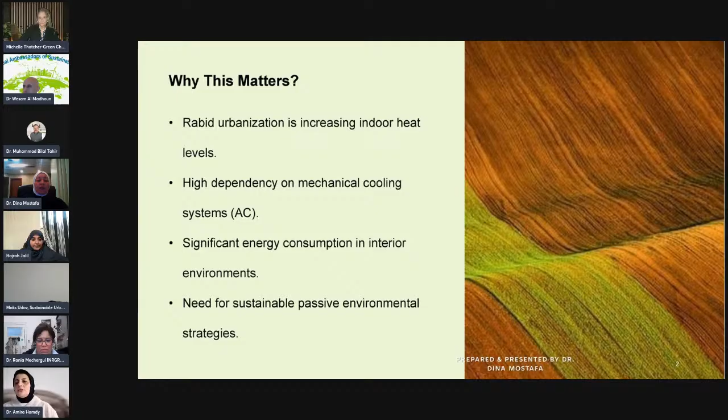My presentation today is about nature-based solutions, the NBS, and biomimicry: how plants and soil play functional components of modern interior environments. First of all, why this matters, why it's very important. Firstly, rapid urbanization is increasing indoor heat levels, as well as the high dependency on mechanical cooling systems, the AC, significant energy consumption in interior environments, and the need for sustainable passive environmental strategies.

What are nature-based solutions? Maybe for the first time you are hearing what NBS is. NBS are strategies that use natural systems to solve environmental challenges. Why do we need natural systems in our life? Firstly, because they enhance thermal comfort, air quality, and human well-being.

And what is also biomimicry? Biomimicry might be a weird terminology that nobody's using except maybe for architects and interior designers. Biomimicry is learning from nature's strategies and systems, and it consists of three levels: form, process, and system.

Form is the shape and structure of plants and trees. Process is how it works, for example how the plant absorbs water from the soil and releases carbon dioxide. And systems, for example the ecosystem relationship, and how we can apply all these into our interior spaces.

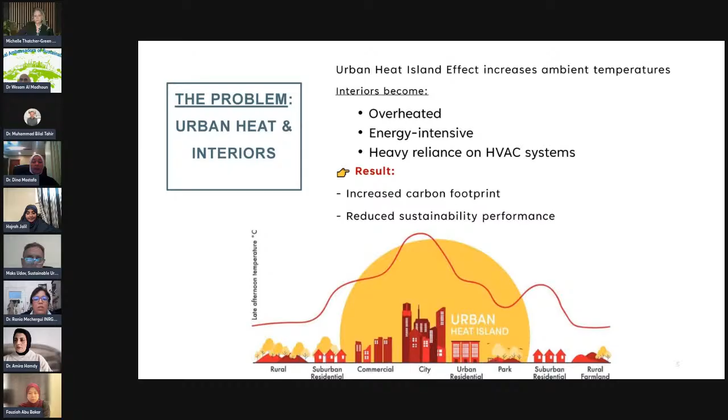Our main problem is urban heat and interiors. Urban heat islands affect the increase of ambient temperatures into our interior spaces, leading to overheated spaces, energy-intensive design, and heavy reliance on HVAC systems. This leads to increasing carbon footprint as well as reducing the sustainability performance in our interior spaces.

So if we adapt a cooling cycle similar to what plants do inside their system - first, the natural cooling mechanisms happening in the plant. Plants absorb water through roots and release moisture through leaves, which is called evapotranspiration, and this process cools the surrounding air.

It has a very good impact on interior spaces, as it leads to temperature reduction from 2 to 5 degrees centigrade indoors, as well as improved humidity balance, which we can apply in interior spaces through vertical green walls, biophilic partitions, and indoor gardens.

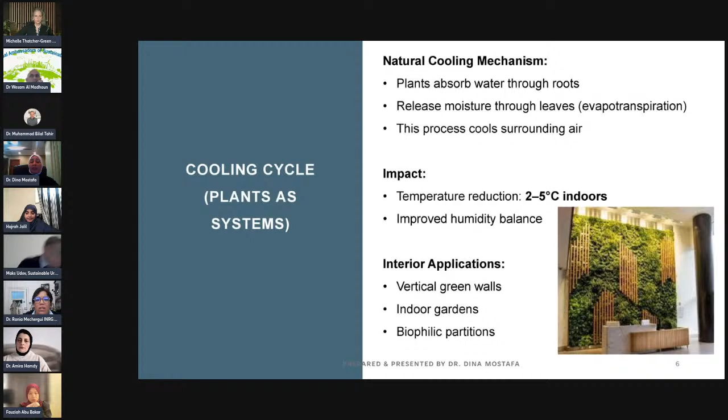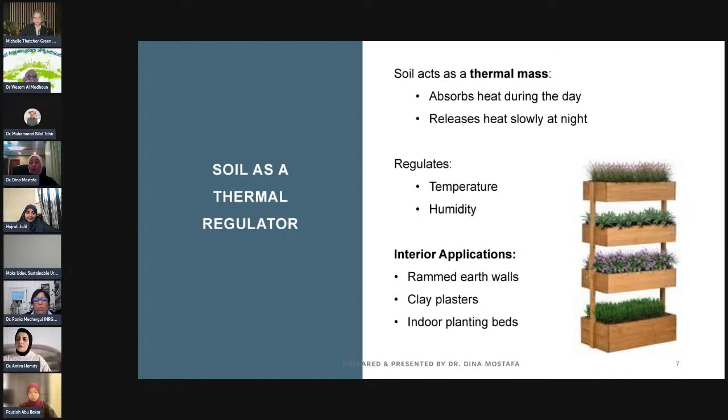In addition, another example: if we take soil as a thermal regulator, soil acts as a thermal mass - it absorbs heat during the day and releases it slowly at night. So it can regulate the temperature as well as the humidity, and we can apply it in interior applications through rammed earth walls, clay plasters, or indoor planting beds.

As we can see here, besides the plants and the soil, this biomimicry translation diagram shows things from nature and the strategy we follow, and how we can apply it into our interior applications.

First example: termite mounds, which have very passive ventilation because they take in the hot air and send it up, creating good airflow inside as a system. Then we have the cactus, which is good for water retention and shading, and can be used as an adaptive shading element in interior spaces.

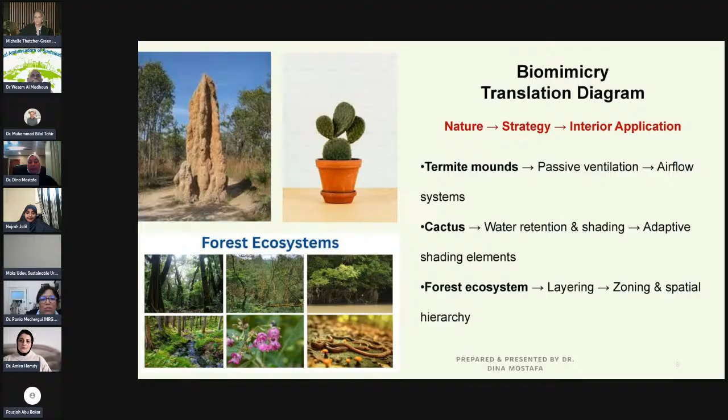Third, we have forest ecosystems, taking into consideration good opportunities you can follow from layering, which gives zoning and spatial hierarchy. Plants also play a functional role in interior systems - they improve indoor air quality, reduce heat gain, and create microclimates.

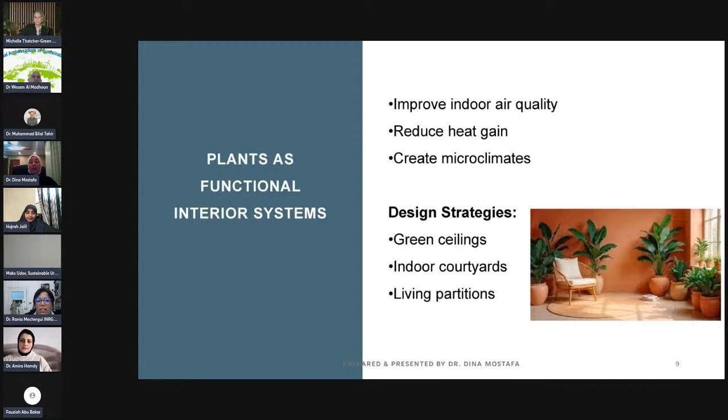So the design strategies we can follow to present any of these examples include applying the green ceiling, indoor courtyards, and living partitions.

Soil and natural materials can also be applied into interiors, as they have high thermal inertia as well as breathable surfaces. This can benefit interior spaces as it stabilizes interior temperature, enhances acoustic comfort, and improves indoor air quality.

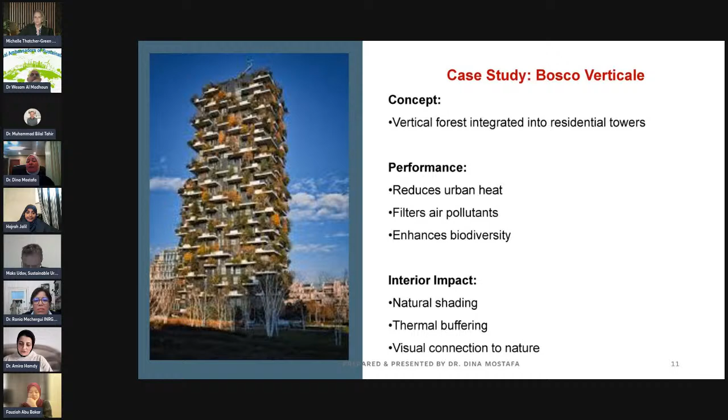One of our examples here is the case study of Bosco Verticale. Its design depends on a vertical forest integrated into residential towers. It has very high performance in reducing urban heat, filters air pollutants, and enhances biodiversity. It had an excellent impact on interior spaces as it allowed natural shading, thermal buffering, as well as visual connection to nature.

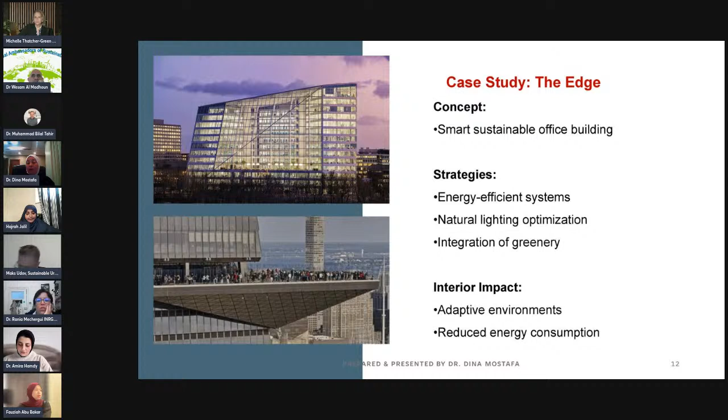Our second example is the Edge building in Amsterdam, considered one of the smartest sustainable office buildings in the world. It provided three important strategies: energy efficient systems, natural lighting optimization, and integration of greenery. It had an excellent impact on interior spaces through adaptive environments and reducing energy consumption.

One very good example currently is where I'm residing, in Saudi Arabia in Jeddah. The Saudi context is designed with the character of extreme hot climate, high cooling demands, and increasing focus on sustainability. So we have a very good opportunity to integrate NBS into our interiors, which can reduce energy use, improve thermal comfort, and support sustainable development.

All of what we have mentioned is being applied as an example in the future model, Neom City. Neom City is a futuristic city focused on sustainability, innovation, and environmental integration. Accordingly, Neom City is also aligned with the Vision 2030, which promotes sustainable cities, energy efficiency, and environmental responsibility, playing a very good role in interior design spaces as it reduces energy consumption and enhances quality of life.

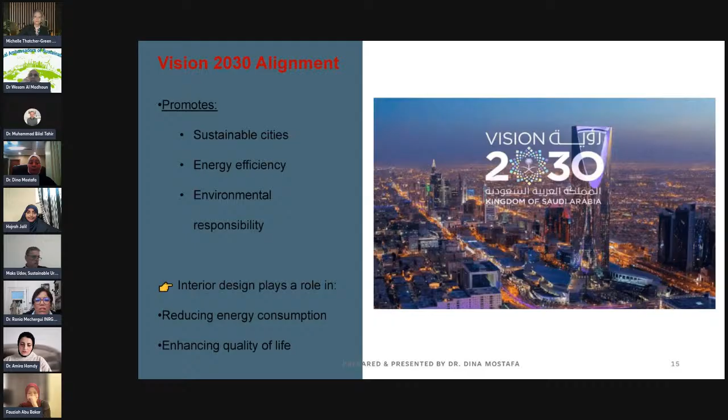According to what we have mentioned previously about interior design application, we have too many solutions for that, using biophilic zoning instead of rigid partitions, indoor microclimate creation, integration of natural materials, and responsive adaptive spaces. It's very challenging as it needs maintenance requirements, water management systems, initial cost perception, and one of the huge things is the lack of awareness.

So our vision is for interiors to be presented as living ecosystems, integrating nature, technology, and AI systems as well. The conclusion is nature is not an inspiration only, but it plays a very functional design partner as well. So the future of interior design lies in integrating natural intelligence into the built environment. Thank you for listening.

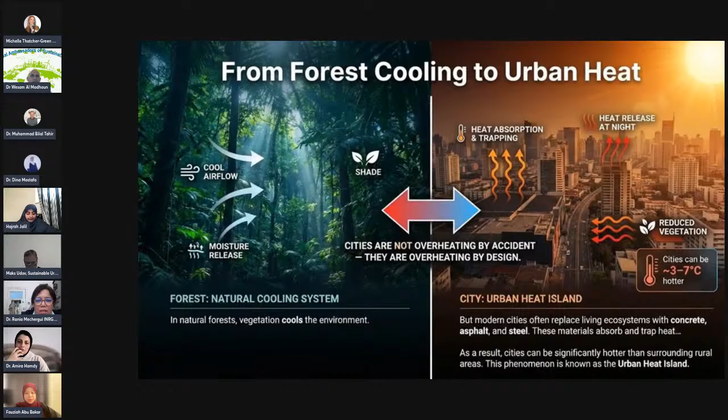This phenomenon is known as the urban heat island effect, where the temperature in cities can be 3 to 7 degrees Celsius higher than nearby rural or forested landscapes. This is not just a temperature issue. Urban heat increases energy demand for cooling, for aircon, causes stress for people, and can worsen the impacts of climate change. So the question we must ask is: if forests can naturally regulate temperature and maintain stable microclimates, why don't our cities do the same? This is exactly where we use nature-based solutions and biomimicry, and this is how we design the cities of the future.

We saw that cities now often get overheated because we remove the very systems that naturally regulate the temperature. So the next step is not complicated in theory, although it can be challenging in practice. We need to bring those functions back. This is where we apply nature-based solutions.

It is a natural system to address urban challenges, not only environmental but also social and economic issues. For example, when we plant more urban trees, we are not simply making a city look beautiful or greener. We are creating shade, lowering the surface temperature, improving air quality, and supporting biodiversity. And when we introduce green roofs, gardens, landscapes, we are not adding decoration. We are rebuilding the city's capacity to absorb more water, reduce runoff, and control the temperature. So we use nature itself as part of the solution.

So how? There are various possible ways. For example, we can plant trees and green roofs that help to cool cities. It can also help nature manage water. When rainfall hits a city, water flows quickly over concrete and causes flooding. But when we have green spaces, wetlands, bioswales, the soil and plants themselves can absorb water like a sponge.

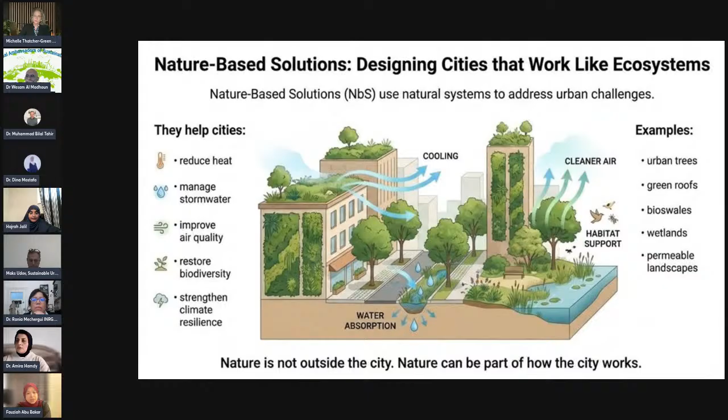And third, plants improve air quality. The trees can capture dust particles, absorb carbon dioxide, and release oxygen. So green infrastructure actually acts as a natural air filter for the city. It is important to say all this can communicate and interact together as a whole system.

Now let's look briefly at how plants actually cool cities. It is like a natural aircon. The first mechanism is shade. The tree canopies block a large portion of incoming solar radiation. Without that shade, surfaces like concrete can heat up extremely quickly.

The second mechanism is evapotranspiration. It is a process in plants that releases water vapor from the leaf, and when this happens, it absorbs heat from the surrounding air, creating a natural cooling effect. The third mechanism happens below the ground. Healthy living soil stores water and moisture, which helps to control the temperature and reduce heat buildup at the surface.

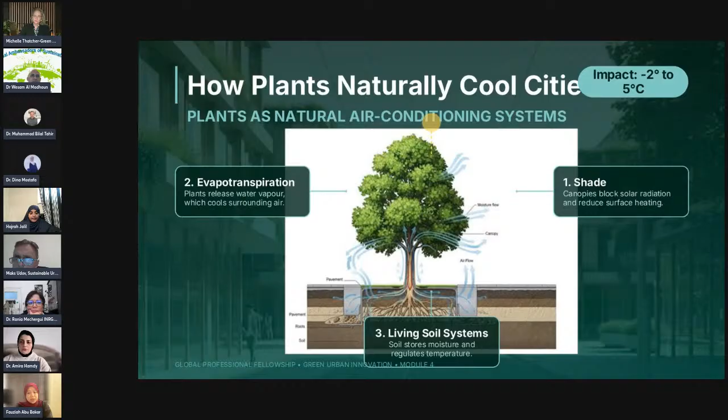So when these three processes work together - shade, evapotranspiration, and the living soil system - the cooling effect can be significant. In many urban studies, vegetation has been shown to reduce surrounding temperature by 2 to 5 degrees Celsius. That is a powerful reminder that plants are not passive elements in the city. They are actually our active climate regulators.

Second, they have a continuous cycling of water - plants release moisture into the air through evapotranspiration. The living soil system - rainforest soils are full of microorganisms, roots, and organic matter that help retain moisture.

Now, the interesting question for cities is: what if we design our urban environment using a similar principle? Instead of a single layer of concrete surfaces, cities could develop layered green infrastructure. Green roofs could function like canopy layers, along with street trees and vertical gardens. This is the essence of biomimicry, where we learn nature's design strategies to solve human challenges.

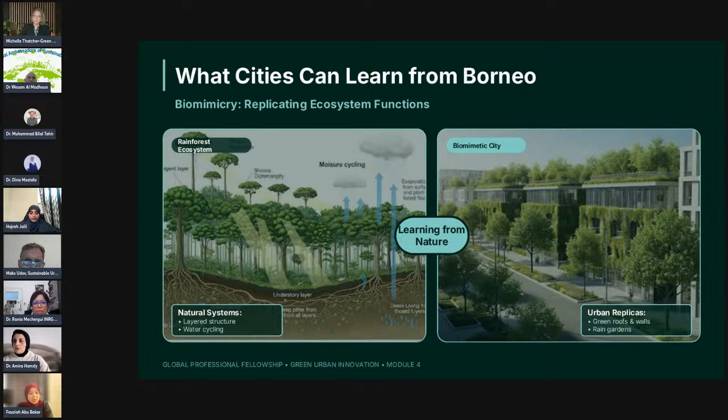By this point, the idea of learning from nature might sound ambitious, but the important thing to remember is that transformation has already started. Around the world, cities are beginning to integrate nature back into their infrastructure.

One well-known example is Singapore, which has positioned itself as a city in nature - urban forests, vertical greenery, green roofs, all integrated into buildings and public spaces across the city. Another example comes from Milan with the vertical forest, where residential towers host hundreds of trees and thousands of plants directly on their balconies.

In cities like Copenhagen, urban streets are now being redesigned with green infrastructure such as rain gardens and permeable landscapes. So a few cities are already experimenting with this idea and demonstrating that urban environments can be both modern and ecological.

Now, how do we actually design the cities that work with nature? There can be 4 practical principles that summarize this.

First is cooling the city naturally. In many cities, well-designed green infrastructure can reduce surrounding temperature by several degrees.

The second principle focuses on water management. Instead of letting rainwater run directly into the drainage system and cause flooding, the city can use living soils and wetlands to absorb and filter the water naturally. This approach mimics how natural ecosystems regulate water.

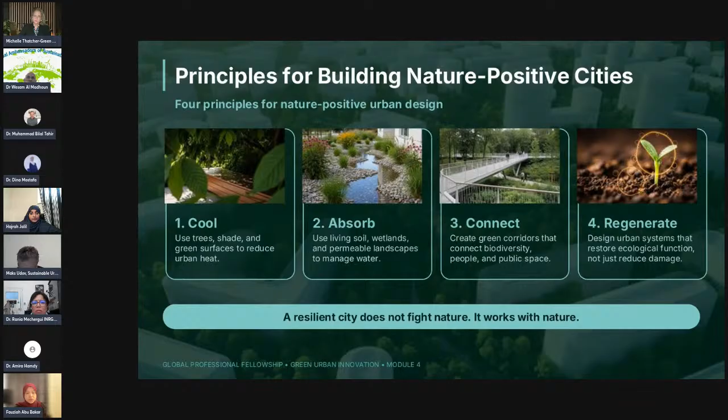After looking at these principles, we can begin to imagine what the next generation of city might look like. A nature-positive city is not simply a city with more parks. It is a city where nature becomes part of the infrastructure itself.

Urban forests provide shade and can control temperature with green roofs, vertical gardens, and permeable landscapes that allow water to move naturally. We have green corridors and, importantly, healthy living soils. Such cities are not only cooler but more resilient to climate change.

In many ways, the future of urban design may not be about inventing something completely new. It is about learning again from the systems that nature has already perfected.

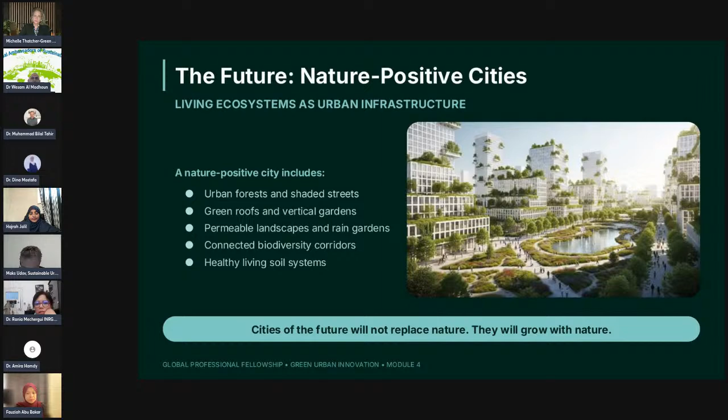For a long time, we designed cities like machines, made of concrete, steel, and infrastructure. But the cities of the future must behave differently, and must function more like living ecosystems.

Cities that cool themselves with trees, absorb water through soils, connect people with nature, and regenerate the environment around them. If forests can regulate climate, store carbon, and sustain life, perhaps they can also teach us how to design better cities. So this is just a simple closing reflection from myself.

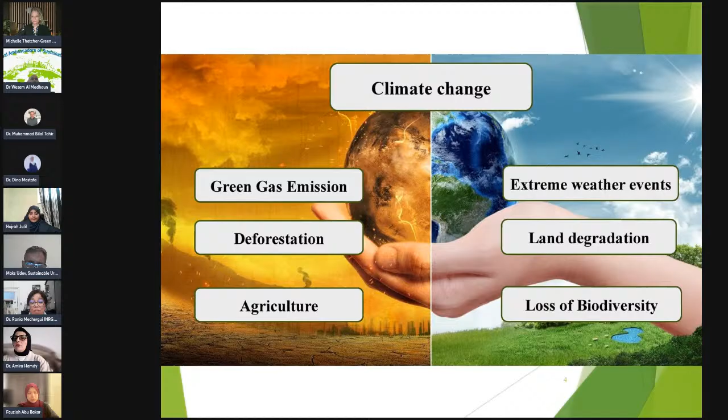Climate change is one of the most significant challenges we face today. The main causes are greenhouse gas emissions, deforestation, and intensive agriculture, leading to several consequences for our ecosystems. This includes extreme weather events, land degradation, and loss of biodiversity, threatening the livelihoods of millions, especially in rural communities.

According to the European Commission, nature-based solutions are solutions inspired and supported by nature, which are cost-effective and simultaneously provide environmental, social, and economic benefits, and help build resilience. Nature-based solutions aim to restore, protect, and manage ecosystems to help mitigate and adapt to issues such as climate change, water management, disaster risk reduction, and urban challenges.

The challenges for nature-based solutions in Mediterranean urban agriculture are: first, water scarcity and climate extremes; high density urban environments; governance and financial constraints; knowledge gaps; and finally, socio-cultural hurdles.

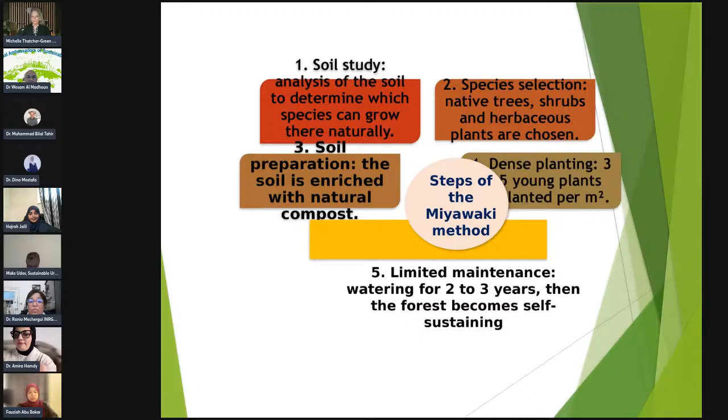The steps of the Miyawaki method: study the soil, prepare the soil, select native species of trees, shrubs, and herbaceous plants local to the region, and dense planting of 3 to 5 young plants per square meter, with limited maintenance watering for 2 to 3 years.

The advantages of the Miyawaki method include rapid plant growth, high density and scenic biodiversity, microclimate and soil improvement, and slowing down erosion while promoting infiltration.

These methods can be applied to central Tunisia, offering an opportunity to involve local planting and preservation communities. The Miyawaki method is a sustainable solution for restoring natural forest in Tunisia, particularly in central regions, by using native species and respecting ecological balance. It creates functional forests that are beneficial to the environment and future generations.

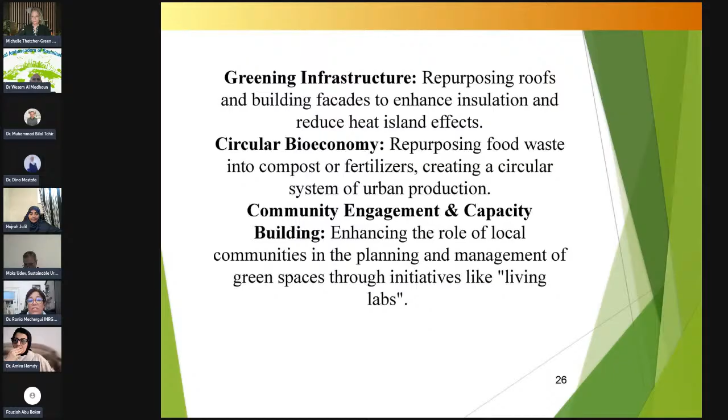In conclusion, the transformation of Mediterranean urban agriculture through nature-based solutions requires shifting from conventional methods towards an integrated ecological approach. Overcoming challenges requires polycentric governance, investment in technology, and tailored, locally-driven action to ensure both environmental resilience and social equity.

Interdisciplinary and participative practices are recommended to fill knowledge gaps and overcome the difficulties practitioners experience in training to achieve the intended outcomes of nature-based solution projects. Systemic and political change affecting every level and partner should be applied through a variety of recommendations, creating an enabling environment for nature-based solutions and ambitious endeavors.

Thank you for your attention.

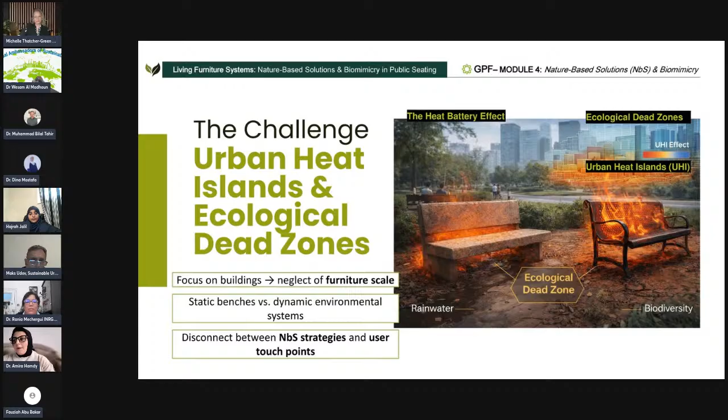So we're trying here to face the major challenges facing us, and we have to address the current failure of this furniture, which creates public seating as ecologically dead zones.

So why don't we think better and shift our design thinking, moving from this static point of view to a more lively and living furniture approach—the nature-based solution, moving from the UHI effect to nature-based solutions.

So the missing scale is discovered here. We have to design from the human scale, from the little scale to the larger scale, from the indoor scale to the outdoor scale.

So if the furniture is no longer an object, how can you believe that furniture can actually be part of the climate infrastructure through nature-based solutions at the micro scale?

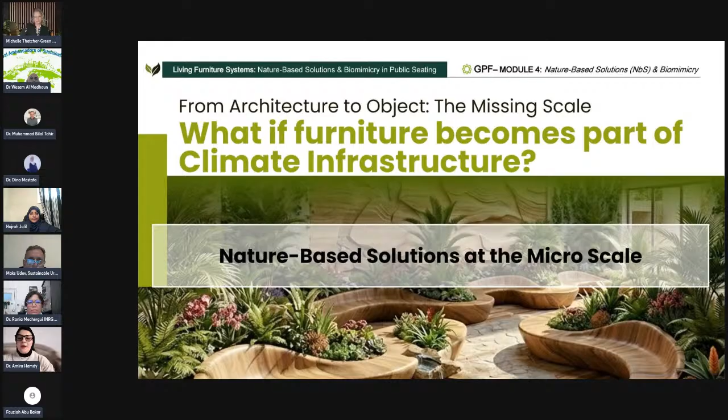These nature-based solutions are having this philosophy of urban acupuncture. Urban acupuncture is about three objectives. If they are present in a place for public seating, then you have achieved urban acupuncture.

The first objective: instead of adding furniture to the place or space, you have to integrate these functional organs—which are furniture—through the urban fabric, giving them function and the ability to change the way citizens move or behave.

This moves us to the second objective: every public gathering point, like parks outside educational buildings, transit stops, and gathering points for hospitality or waiting areas, should have small-scale landscaping interventions of this vital living furniture, making the nature-based solution visible and improving the citizen experience.

That achieves objective three. This matches perfectly with the biophilic design elements introduced earlier by Kellert back in 2008.

The final two are evolved human-nature relationships and place-based relationships, where we have to maintain modular systems in furniture design within public spaces, and integrate living plants, soil substrates, and water cycles.

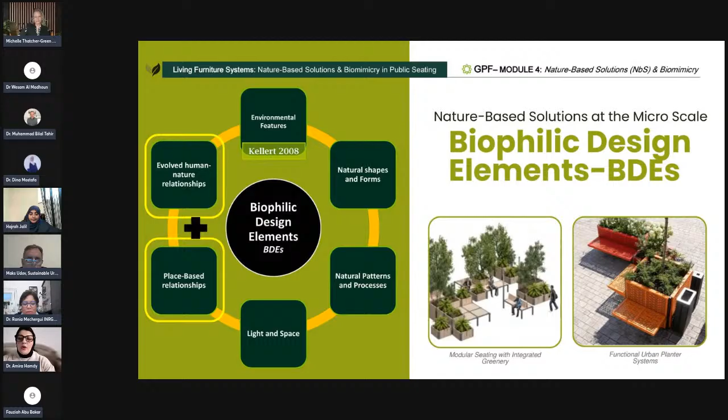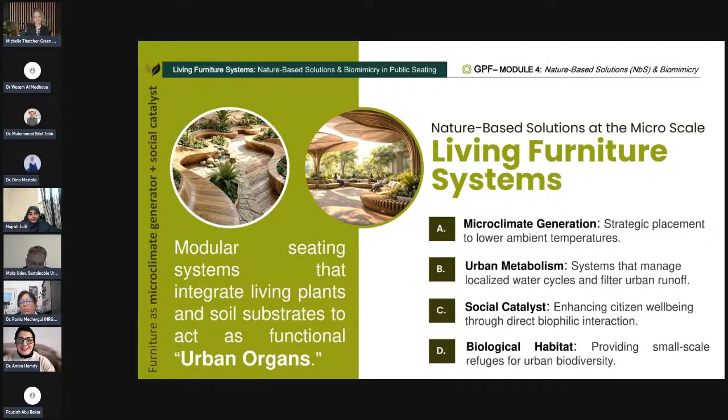This transforms the furniture from static, passive matter into a microclimatic generative organ in the public space, and also a social catalyst within the space.

So the question here is that design should not only come from the environment or environmental patterns—we also have to design for the human experience.

We always ask a question: how does it feel for the user if we make this switch? What comes back to the user from this switch?

The result says that through these nature-based solutions and living furniture systems, we achieve thermal comfort within shade, airflow, and cooling surfaces, and enhance social engagement through special materials, green materials, texture, smell and sound—enhancing social interaction and inclusivity for this place.

And the biophilic psychological benefits move not only from comfort, but to actual well-being and behavior change for the citizens inhabiting this place.

So taking you now to my research insights, where nature-based solutions actually meet biomimicry, and they work together to produce biological and environmental intelligence, translating this into design solutions. So I'm taking you now to four case studies.

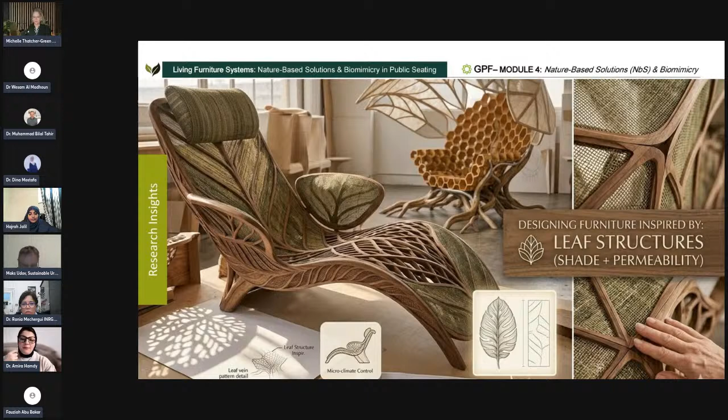I believe you know that leaf means inspiration, shading and living furniture. Tree canopy means filtered light and water flow. These are for designers. Roots means the strategic logic if we are designing for something, and now we are translating it to concept. So if we're taking it as metaphors, we are moving it now to design strategy, to design outcome. So now furniture became part of the architecture, and the architecture became a smaller part. It became now a micro architecture where people directly inhabit this architecture through the human experience. We can actually support it by materials, by ergonomic basis, by design ambience all around it, and we can find the place or seating where people can actually be connected to.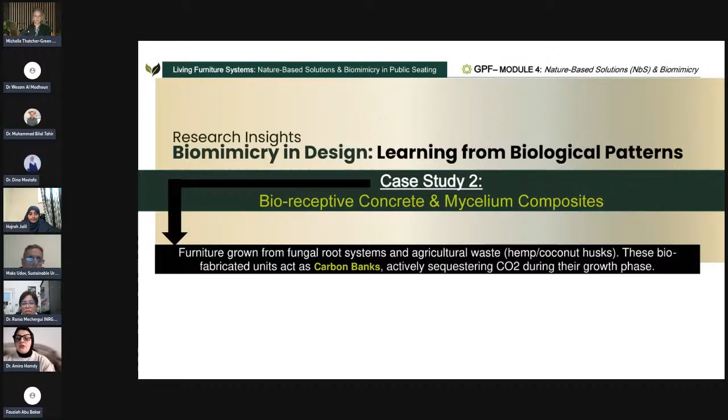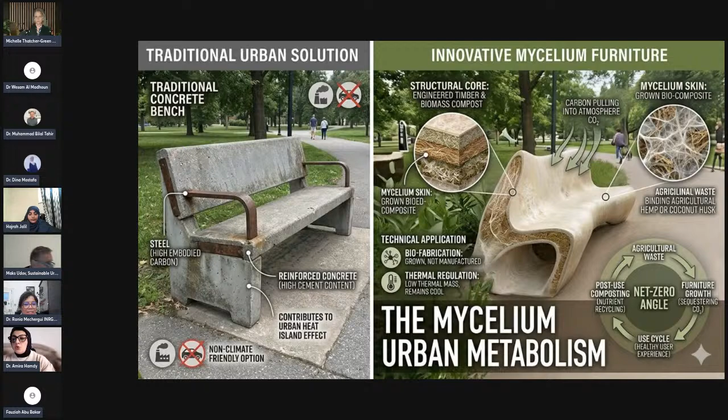Moving to the second case study, about learning materials and dealing with materials which are bio-receptive concrete and mycelium composite. I introduced to you a design which is about exploring a nature-based material, mycelium composite, which can actually be taken from locally agricultured sources, maybe pineapple, coconut husks and hemp. These natural materials can help sequester carbon dioxide, and make the seating more stable with zero bad benefit for the environment, and excellent for acoustic and thermal insulation. It also acts as a carbon bank for this design, where people can actually inherit and find that it's more attached to this design.

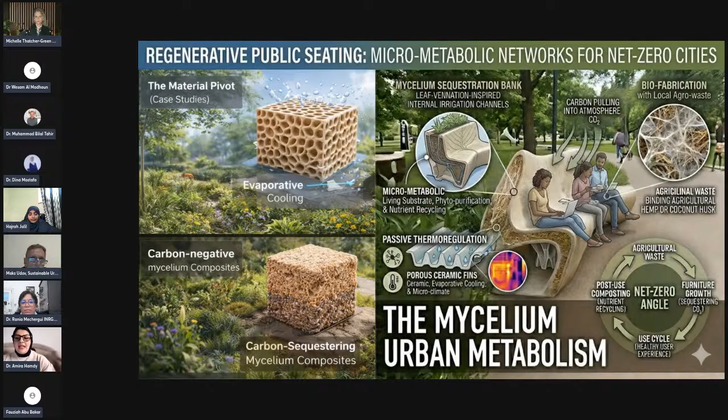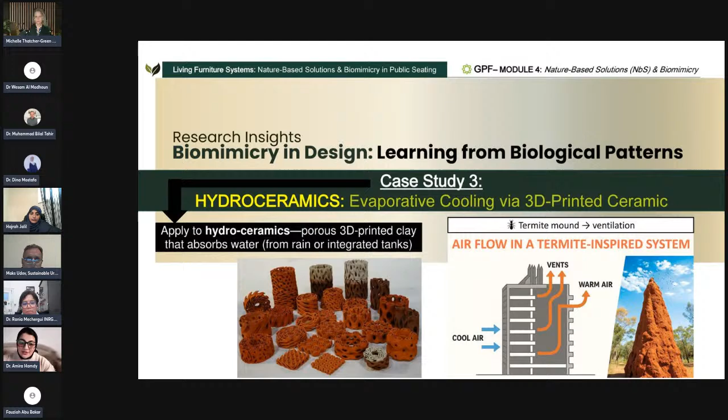You can find it more related to the third case study, about hydroceramics and evaporative cooling. Now we're talking about cooling and how to learn from nature through cooling. I will take termite mounds and cactus. You find this lesson from nature, that cactus and termite mounds have a surface which is highly geometrical, an unstable surface. So it acts like it can lower down the seating. They can stay cool within the very intense sun in the desert. So by mimicking this high surface area geometry within the 3D porous clay, we try to design new seatings that can go away from this urban heat island effect, moving the concrete benches from a heat battery.

To the new net zero pathway, maybe a cooling furniture we can call biomimetic hydroceramics furniture. This furniture can actually stay and prove itself within intense and very hot climatic weather. In very high temperature, this clay actually sweats, and when it sweats, it evaporates water and makes a natural cooling system that lowers down the temperature of the seating by 5 to 10 degrees compared to a normal cement-based concrete seating.

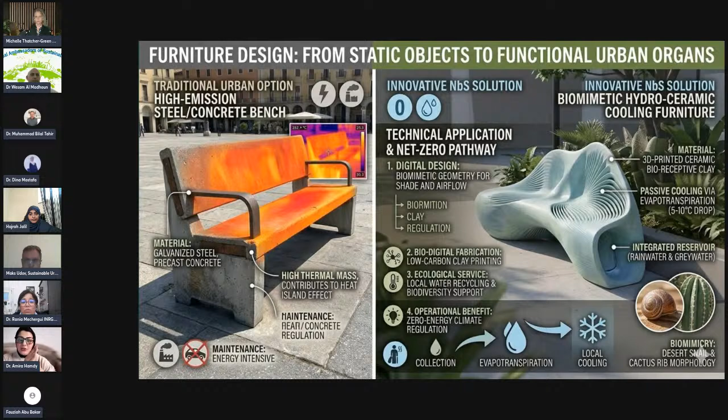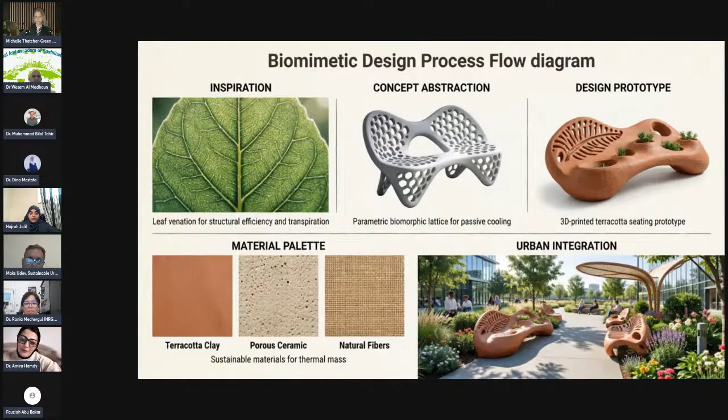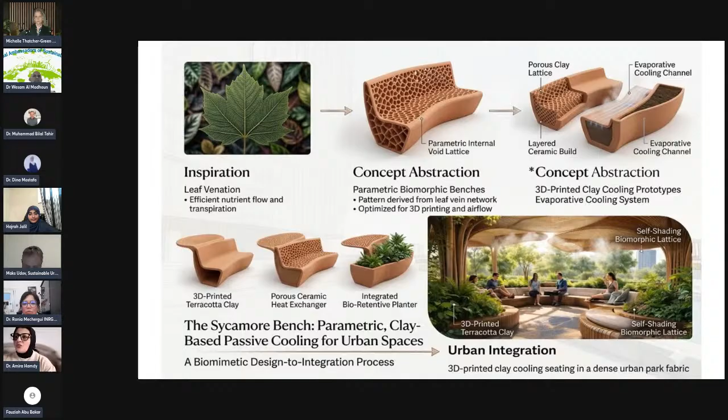So it's actually a very hybrid design approach, and we can see that we can combine more than one approach of design. We can approach the first one from nature, and the second one we combine the materials, the mycelium, and find the third one, and we can combine all these approaches within, maybe introduced to hospitality sectors that are seeking net zero goals and net zero initiatives. It can be within park gathering nodes, outdoor waiting areas, transportation, hospitality cafe terraces, rooftop restaurants, and transitional outdoor spaces. I even gave them a name, which is Sycamore Bench.

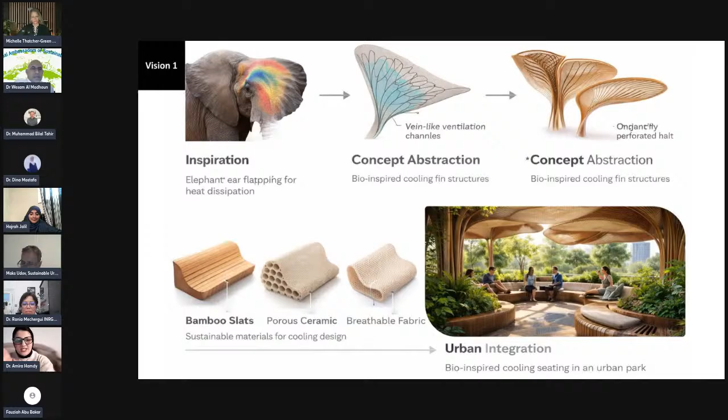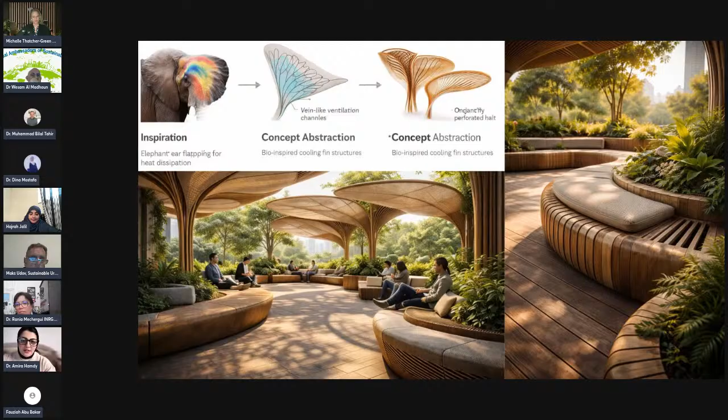We can actually use green materials like bamboo as a skeleton and put the porous material on it. It's a multi-phase case study, you can use all the previous approaches on it, you can use the mycelium. You can use this in outdoor waiting areas, and it feels more like social interaction within the space, and also cooling canopies that I can see and find.

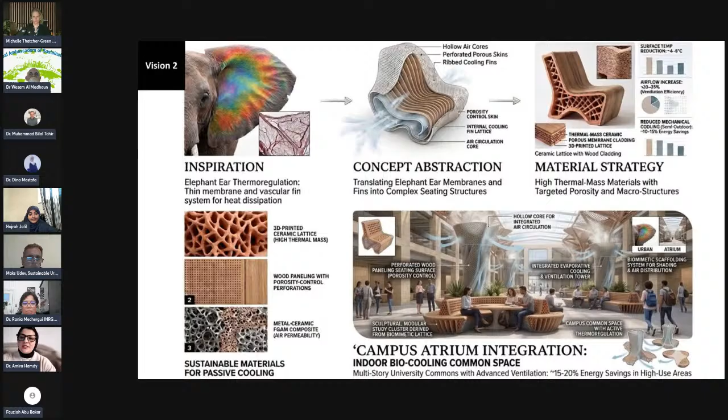So finalizing and leaving you with this theme, that we are now rethinking this small scale of architecture. And now, if buildings are shaping cities and landscaping are shaping environments, then furniture definitely are shaping human experience.

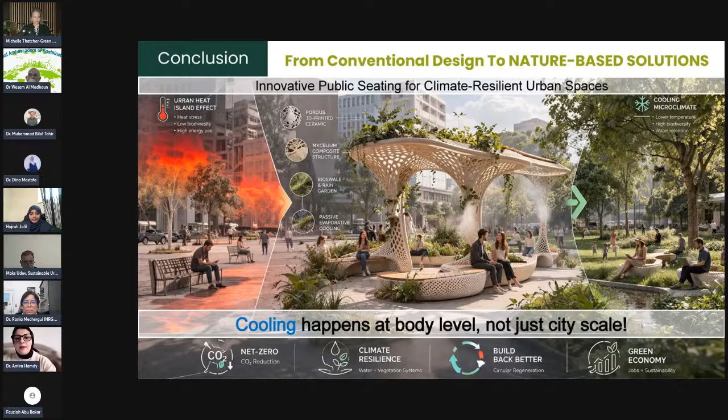That's why designing for the climate becomes personal to us as designers. So we are gathering all what we said, saying that cooling happens at the body level, not just the city level. Sustainability is not proven until it's tested, until people experience it. We have to experience sustainability to make sure that the place we are designing is already sustainable. This way we can shift conventional thinking to nature-based solutions and innovative public seating for climate resilient urban space, meeting the Build Back Better goals, net zero goals, climate resilience and SDG goals, to enhance the user and citizen experience.

Thank you, and I hope you enjoyed it. I'm okay to take all the questions.

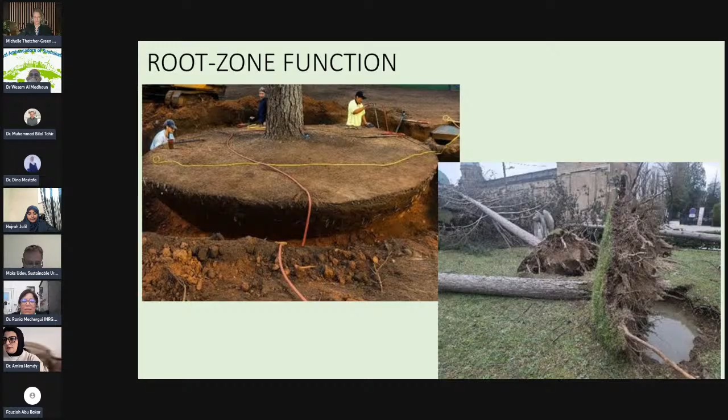This is especially important in hot and water-stressed regions. In these climates, water is not just a utility issue, it is a structural urban issue. Infiltration matters, water retention matters, root access to water matters, and shade matters also.

Shade is not a luxury. In hot cities, it is basic infrastructure. It affects comfort, health, walkability, the quality of public space, and ultimately the ability of a city to remain livable.

That is why I believe we need to move beyond fragmented solutions. Many existing approaches are valuable: sponge city thinking, soil improvement strategies, structural soil systems, and biomimicry. But too often, water, soil, biology, root development, anchorage, and canopy performance are still treated separately, as if they were disconnected. That is the real limitation.

The sustainability of urban trees in these challenging times can only be secured through preventive arboriculture. This is one new term. This means taking action early to protect tree health, stability, and vitality before serious damage or decline begins.

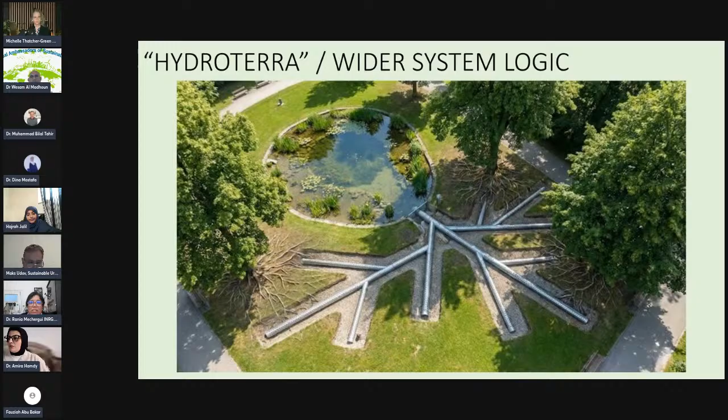The logic is simple. Water enters the soil, remains porous and biologically active, roots grow deeper and stronger, and trees become healthier and more resilient. As a result, cities benefit from better cooling, improved water regulation, and greater long-term ecosystem stability. Many existing approaches are valuable, but they are still too often applied in isolation. Our focus is to connect water, soil, roots, and tree performance into a living and functional urban system.

The drill to fill method. The method we use is called drill to fill. It delivers water and nutrients deep into the tree's root zone rather than applying them only on the surface, as it is commonly done. It is a low disturbance root zone restoration technique that can be used for both newly planted and existing trees. Small holes are made around the root zone without major excavation, and these are filled with a functional substrate designed to improve aeration, biological activity, water availability, and root access.

The principle is simple. Instead of treating only the surface, we restore function deeper in the soil profile, where roots actually need oxygen, water, and biological support. This approach helps trees become healthier, more vigorous, and more resistant to disease and wind throw.

AquaVault is also a new system. One component we are currently developing within this broad root zone approach is a water buffering element designed for hot climates, and its purpose is to retain part of the available water within the root zone and make it available over time, instead of losing it too quickly through evaporation or ineffective surface wetting. This method helps both newly planted saplings and established trees make better use of smaller amounts of water, supporting healthier and more vigorous growth.

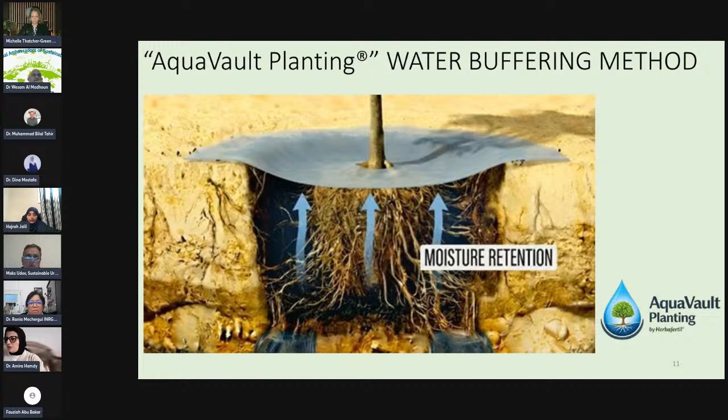Infiltration matters because it is not only about the drainage. It is the starting point of soil biology, root function, and canopy development. And in turn, the canopy gives back to the city through cooling and shade.

When this system functions properly, the benefits go far beyond simple tree survival. Better infiltration improves the local water balance, stronger root development improves anchorage and wind stability. Healthier biological activity improves nutrient cycling. Better canopy performance improves the urban microclimate, and healthier urban trees help support wider climate adaptation goals at both neighborhood and city scale.

This is why I believe tree planting must be understood not as a symbolic act, but as infrastructure designed below the ground.

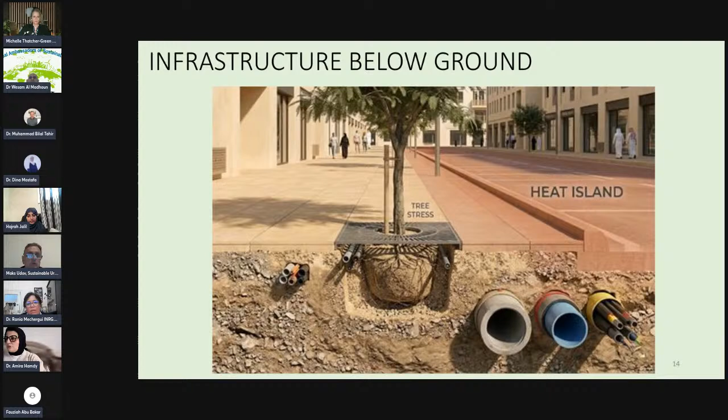Urban utility networks are planned in advance and mapped in technical drawings. In the same way, trees as urban infrastructure must also be given carefully planned long-term positions and adequate space. The presence of one must not compromise the other, as is too often the case today.

If cities continue to plant trees in degraded and dysfunctional soil, they will continue to invest in short-lived results. But when root zone function is restored, trees can provide lasting shade, cooling, stability, and resilience. In other words, they can become true climate infrastructure.

So the core message I would like to leave with you today is simple: climate resilience does not begin above ground, it begins below ground. As summers become hotter, rainfall more irregular, winds stronger, and environmental pressure greater, cities can no longer afford to treat soil and roots as a secondary issue. If we want sponge cities, healthier soils, cooler neighborhoods, and more resilient urban climates, we must begin where these systems come together: in the soil around the roots of the tree.

I invite everyone to meet me at Futurescape Global Riyadh, Saudi Arabia from 8 to 9 June 2026, where I present my sustainable concepts. Thank you very much.

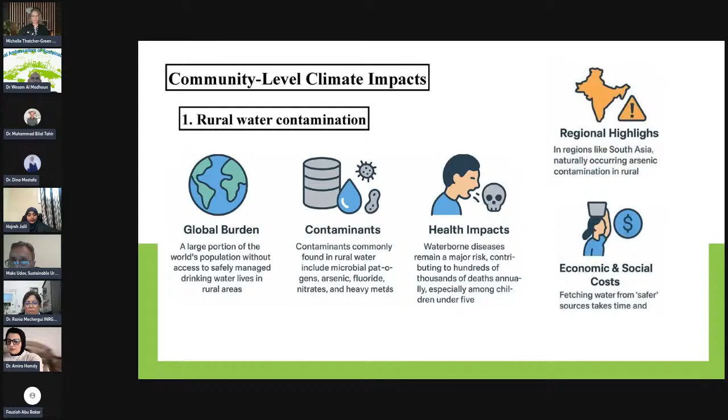Due to this rural water contamination, there is also a social and economic cost. Fetching water from safer sources takes time and increases the cost. The next challenge, which has already been discussed in our session, is the urban heat island effect. I think there is no need to explain it further.

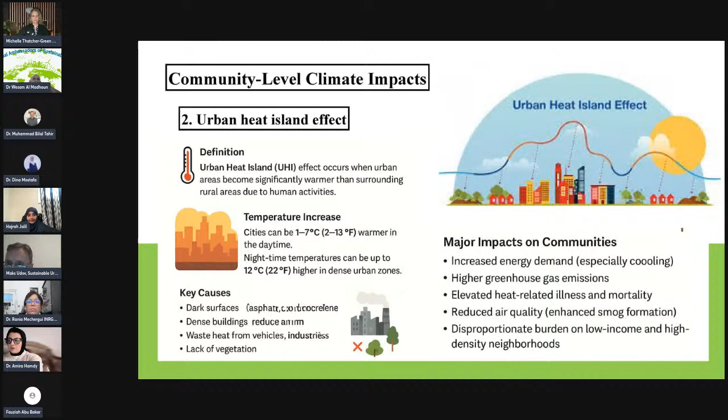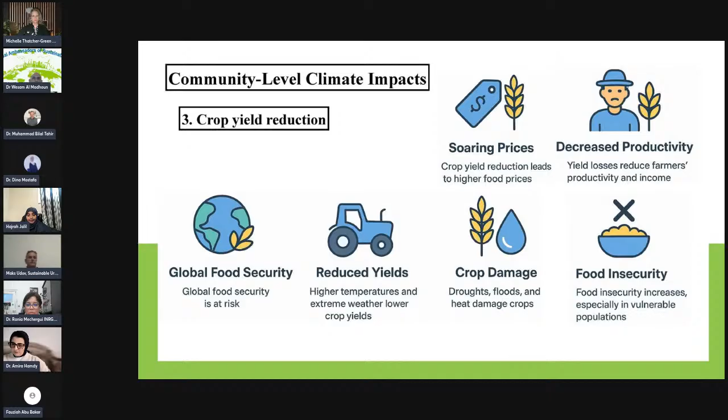But how do these challenges actually affect it, and what is the solution behind this? How can we solve these problems? Here we have discussed the nanomaterial solution. We have proposed the innovative material solutions.

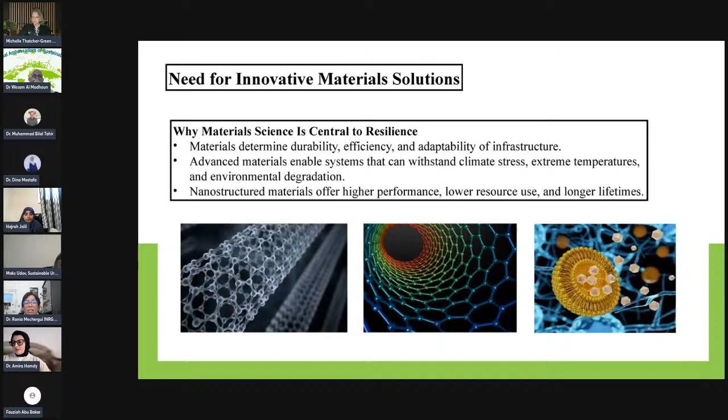Why is material science central to resilience? The materials determine durability, efficiency, and adaptability for infrastructures. Advanced materials enable systems that can withstand climate stress, extreme temperatures, and environmental degradation. The nanostructured materials offer high performance, low resource use, and a longer lifetime.

Nanostructured sustainable materials are materials engineered at the nanoscale, 1 to 100 nanometers, to enhance physical, chemical, and mechanical properties while promoting environmental sustainability. They are designed to reduce resource consumption, minimize pollution, and improve energy efficiency across various applications such as catalysis, energy storage, environmental remediation, and sensors.

Here are the key features due to which we have introduced nanomaterials at the community level to solve community level challenges. The first reason is the large surface area, high reactivity, tailorable properties like band gap engineering, and enhanced conductivity. We can enhance conductivity, improve mechanical strength, and use low cost scalable synthesis methods like sol gel, hydrothermal, green synthesis, and chemical precipitation.

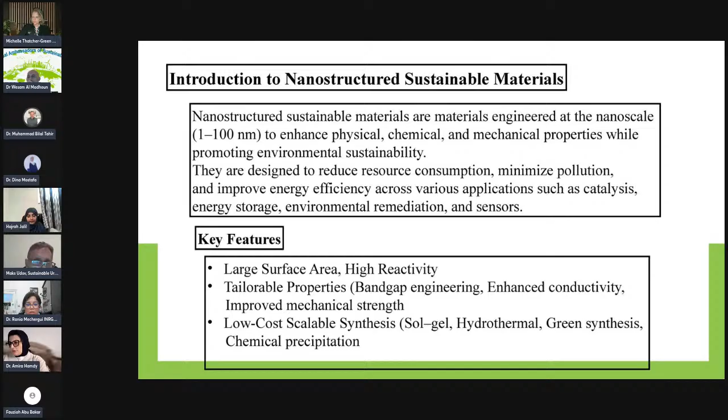Here in the case study of clean water accessibility, we have synthesized MoS2 based nanomaterials for the photodegradation of the spent wash in the sugar waste industry.

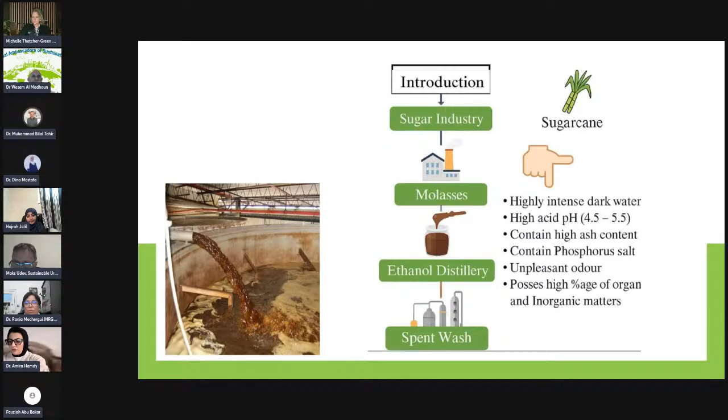From the sugar industry there is a wastage which we can say is spent wash, which is very dangerous for human health. It is highly intensive dark water, with high acidic pH, contains high ash content, phosphorus salt, unpleasant odor, and a high percentage of organic and inorganic matter. It's a very common problem in cities where there are sugar industries.

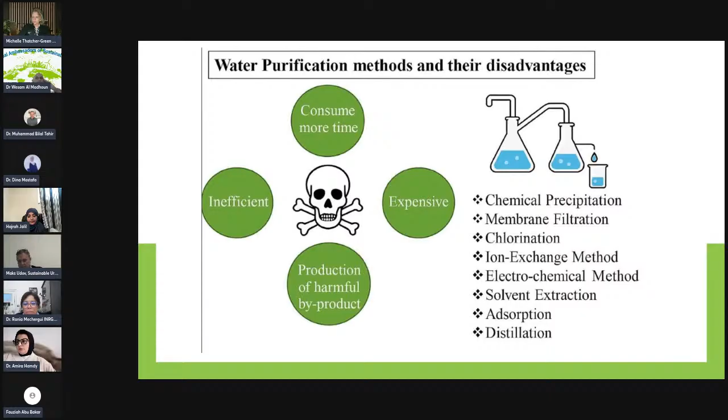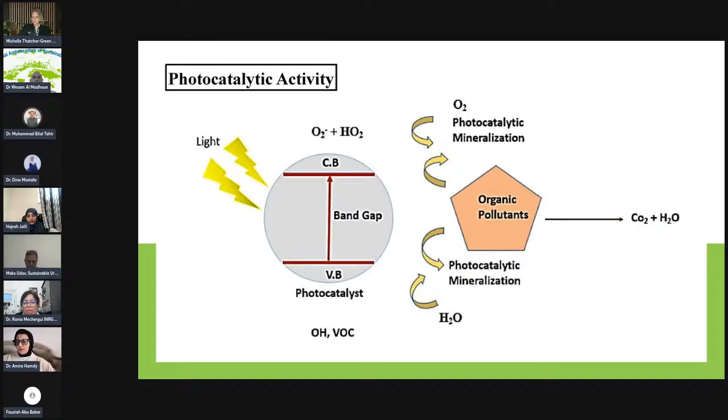These methods have disadvantages like they consume more time, are expensive, produce harmful byproducts, and are inefficient. So we have chosen photocatalysis to degrade the contaminants in the water, to provide solutions for contaminants in water in rural areas.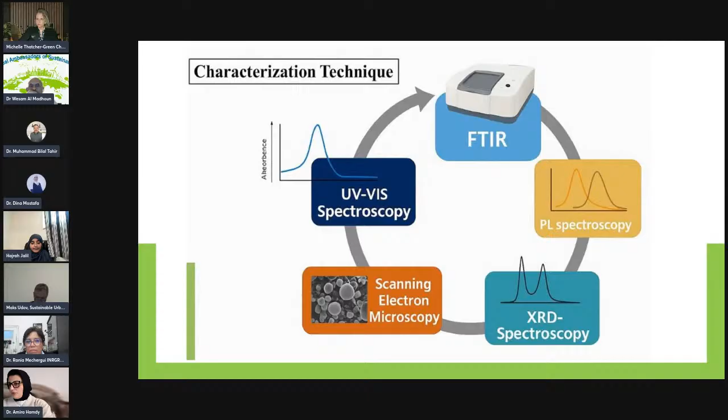Characterization techniques which we have utilized to characterize our synthesized materials: first, we performed XRD analysis to confirm the formation of our nanomaterials. Next, we performed UV visible analysis to check the band gap of the synthesized materials. We also performed FTIR analysis to check the bonding, and SEM analysis to check the surface of the synthesized materials.

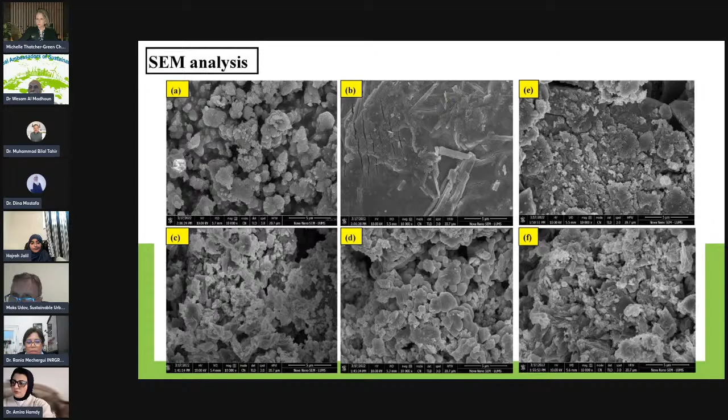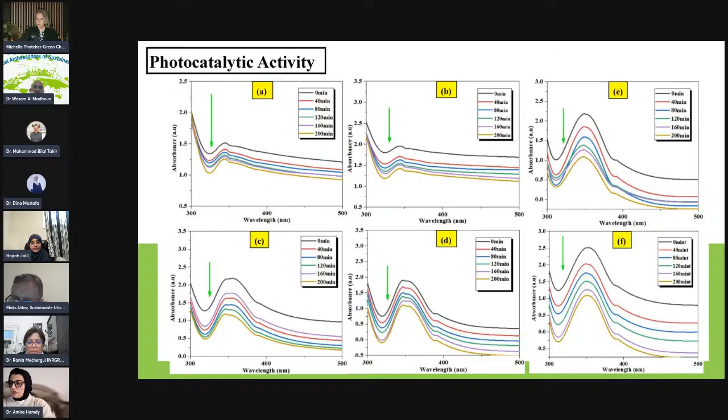We performed photocatalytic activity to degrade the pollutants, to check the suitability of our nanomaterials for the wastewater contamination solution. We can see that as the nanomaterial-to-host material ratio increased, the degradation efficiency also increased.

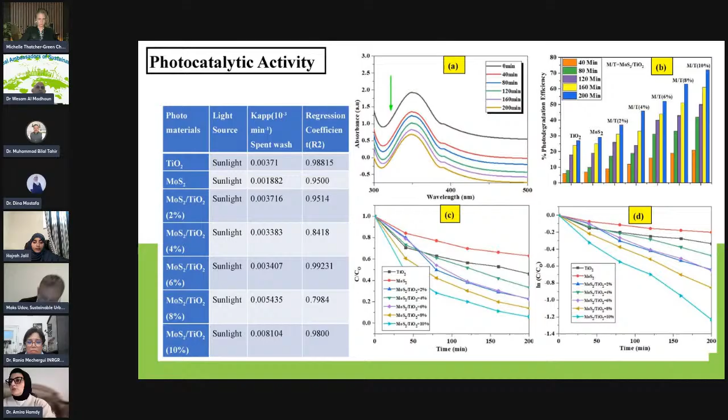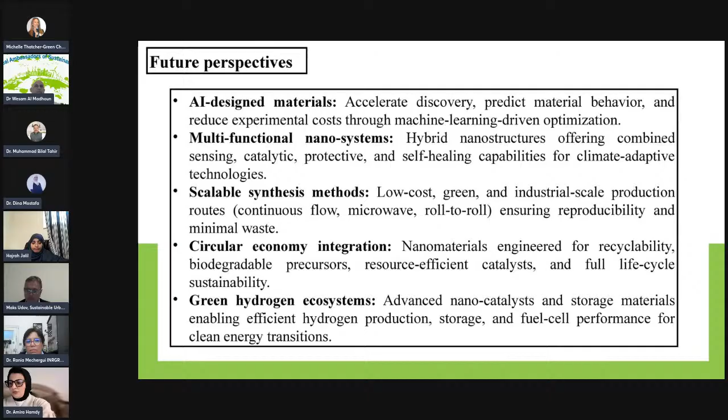In conclusion, we can say that nanostructured sustainable materials provide high performance, low cost solutions for climate resilience and energy, water, and environmental solutions. So there is a need to strengthen education, capacity building, and industrial academia collaboration is essential to scale technologies from laboratories to real world application.

Future directions, including AI-designed materials and the green hydrogen ecosystems, highlight a transformative opportunity to build a resilient, low carbon, and sustainable future.

Thank you. This is all from my side.